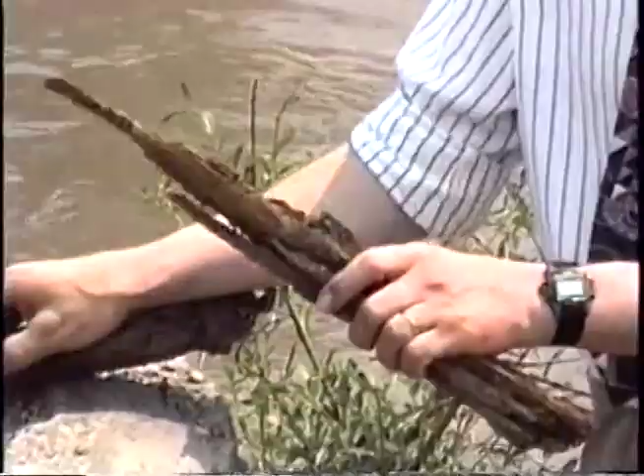A boring was taken down through the center of these columns, and what was found is that these steel-encased concrete columns are founded on wooden piles that were driven down to support the loads of the bridge. We found these old wooden piles that the concrete piers sit on are rotted and degraded from the years. The first several feet were totally missing, so we determined that the existing piers were not suitable for construction of a new bridge.

The study process includes several steps. First, define the purpose and need, or why we're doing the project. Second, define the alternatives considered for the project. Third, assess the impacts of those alternatives. Fourth, prepare an environmental document that meets the requirements of the National Environmental Policy Act, or NEPA. Fifth, obtain agency and public comment. And sixth, select a preferred alternative for implementation.

To accomplish the process, we've devised several ways that the public can get involved and we can obtain their input.

The first is a series of public workshops. We've already held two of those workshops, and there'll be another one here later this summer.

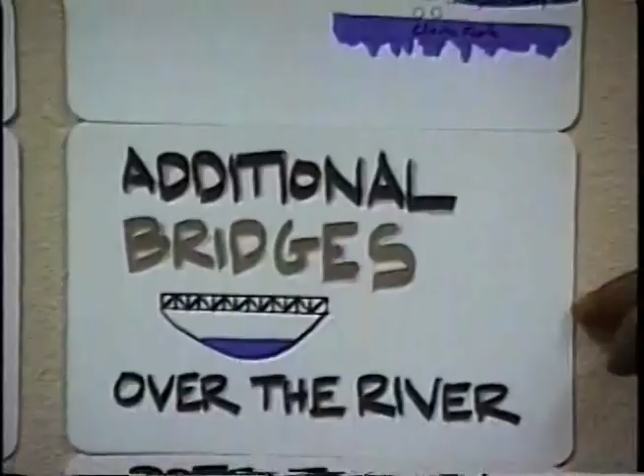There's been concerns voiced along the river corridor about the number of bridges crossing the river, and that people feel like the number of bridges may detract from the visual aspects of the river corridor.

And potential impacts to the island. There's an island located at California Street that will ultimately need construction of a pier, and what are the impacts to the island as a result.

We have a column of others. If you have any other issues that we need to consider—this is just a brief summary—please feel free to contact us.

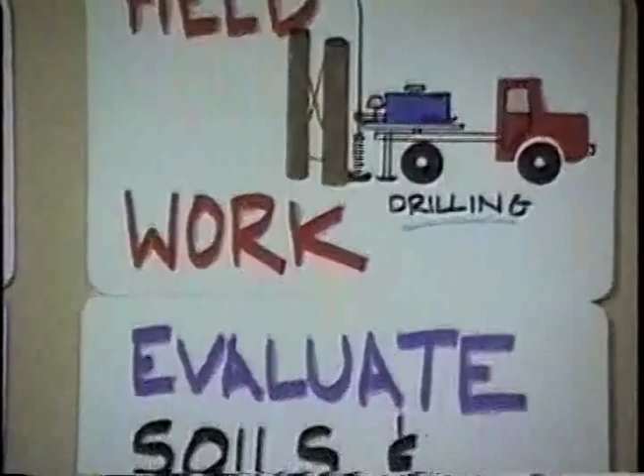Another part of our work was to evaluate the adequacy of the piers from the old bridge that was installed in 1906. As we talked about in the field, we performed drilling of those piers to assess their condition and found they were not suitable for use in a new bridge. Also included was a structural evaluation, a hydraulic analysis, and an analysis of scour to determine how susceptible those existing piers would be to erosion during flood events.

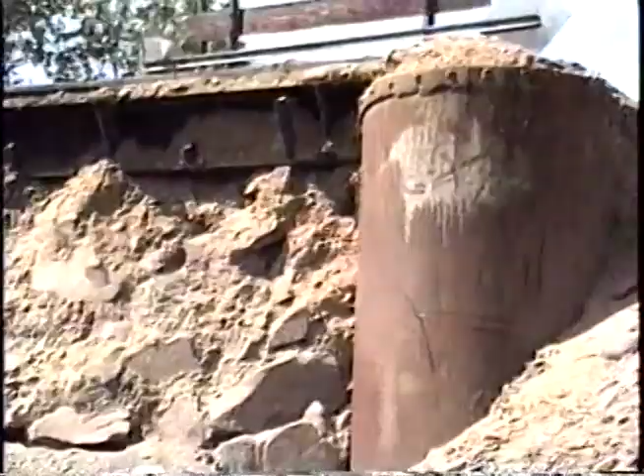Also part of the study is to prepare a NEPA document. As I mentioned before, the NEPA document meets the requirements to qualify for federal funding. Basically, an environmental document has to be completed to assess all of the environmental impacts of a project before it can be eligible for federal funding.

To review that briefly, what's contained in a NEPA document is documentation of the project's purpose and need, a description of the alternatives considered—which will typically always include the no-build and the build alternative—and then an evaluation of different areas of the environment and what the impacts are.

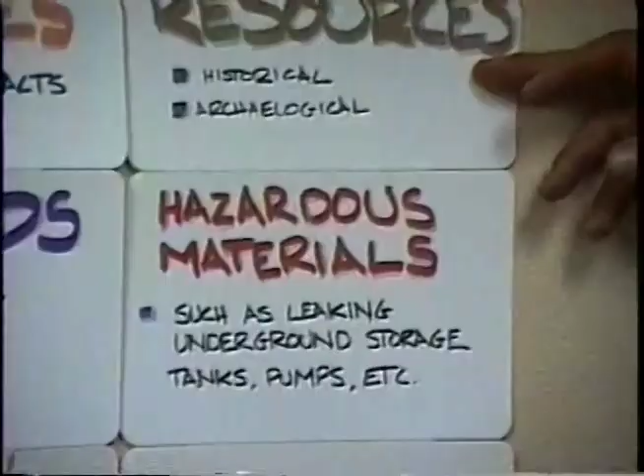Land use impacts, socioeconomic impacts, transportation, right-of-way impacts, farmland impacts, air quality impacts, noise, water resources, wetlands, wildlife, and fisheries, floodplain impacts, impacts to threatened and endangered species, impacts to parks and recreation, cultural resources including both historical and archaeological resources, impacts to hazardous materials that may be present in the project area, visual impacts, and impacts of construction such as noise, traffic delays, access, and so on.

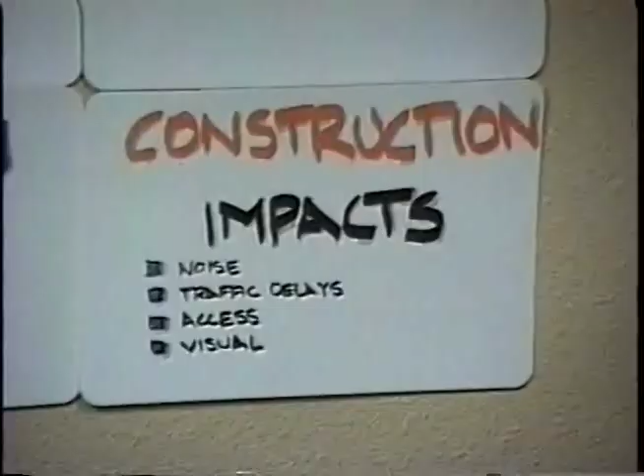So that summarizes all of the areas of the environment that are evaluated in an environmental document.

The California Street Bridge was identified in the non-motorized transportation plan that Missoula developed a couple years ago. The transportation plan identified a system of both trails, or off-street facilities, and on-street facilities to integrate non-motorized transportation such as pedestrians and bicyclists into the transportation network.

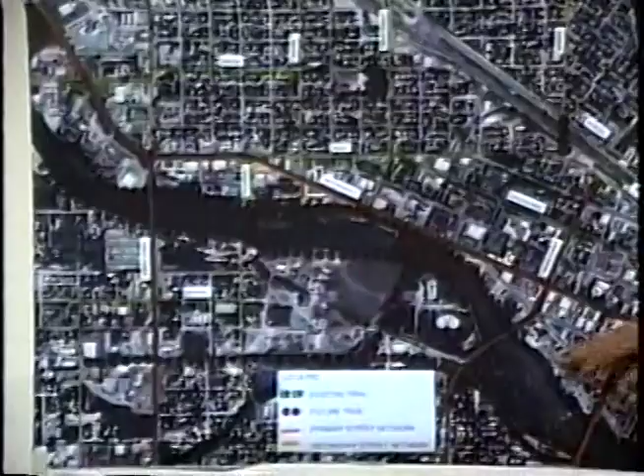The existing trails are shown in green squares, and it may be a little hard to read, but it involves the trail system that is the riverfront trail system in the McCormick and Caras Parks and South Shore Park areas. Proposed is an extension of those river trails along both sides, shown in red. The California Street connection is shown here.

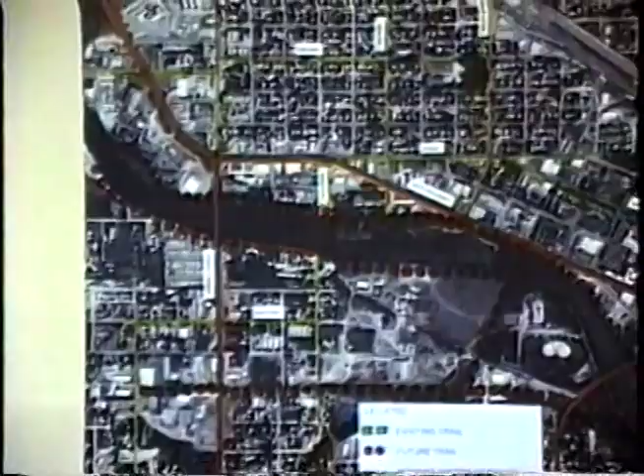Also included in the plan was a system of on-street facilities on both the primary streets, shown in orange, and the secondary streets, shown in yellow.

Once it was determined that we couldn't use the piers, then we took a step back to really evaluate whether California Street was the ideal location for integrating into the non-motorized transportation system.

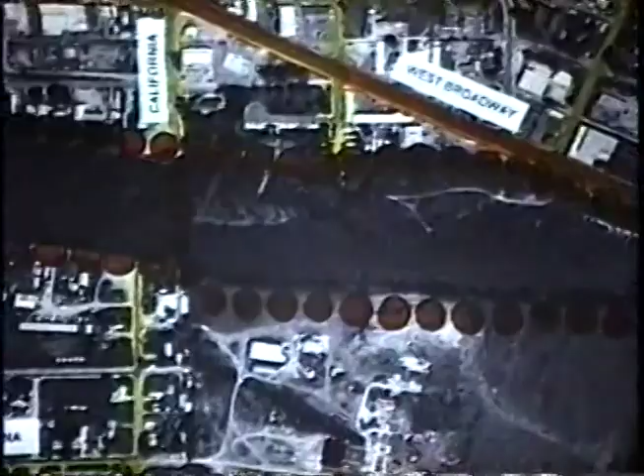We considered four different sites: one, a pedestrian bridge adjacent to the bridge at Russell Street; a bridge at California Street; a bridge at the end of Burton Street that would align opposite the old Champion Mill site; and another one at the end of Scott Street, also tying into the area on the south side, on the Champion Mill site on the south side of the river.

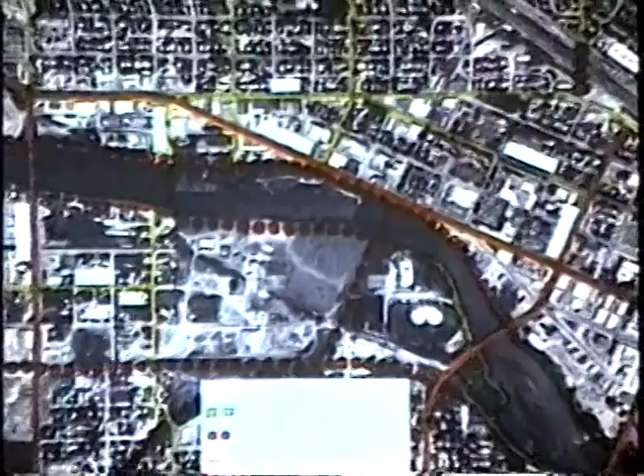In considering all of those alternatives, we developed a set of evaluation criteria to evaluate each one of these alternatives with regards to one another.

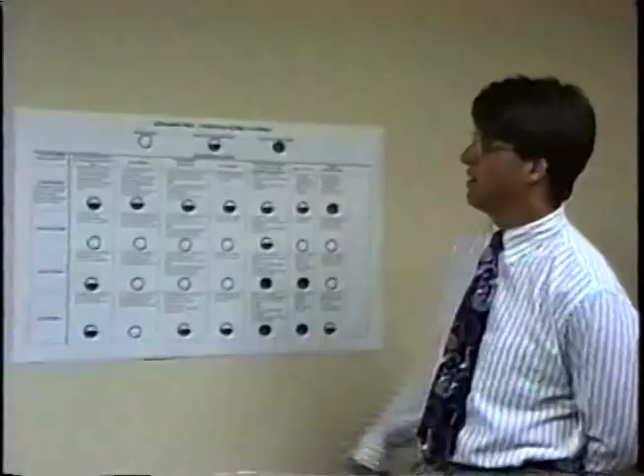I'm going to describe this briefly; I'm not going to be able to describe the entire evaluation. A copy of this was contained in the second newsletter that was distributed. If you'd like a copy of this evaluation matrix, please contact us and we'll send you a copy of that newsletter. But the criteria evaluated included conformity with the non-motorized travel network plan, as I described.

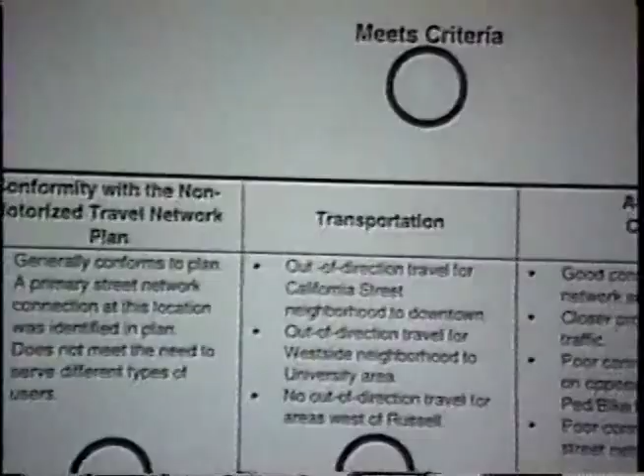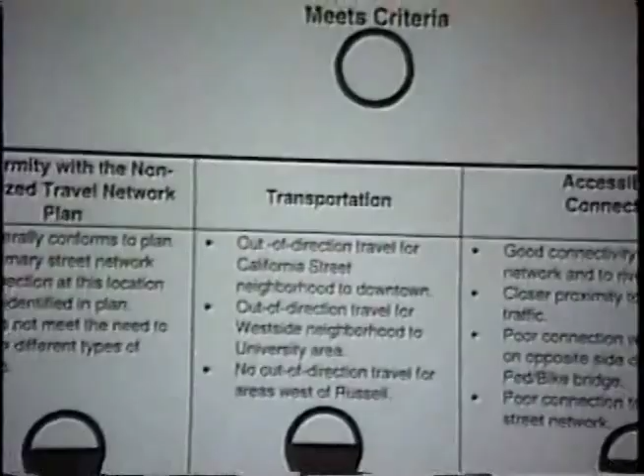It included transportation, which involved how well the bridge location served different neighborhoods for people trying to achieve major destinations such as downtown or the university, and whether it was a direct route for the people living in those neighborhoods to reach those major destinations.

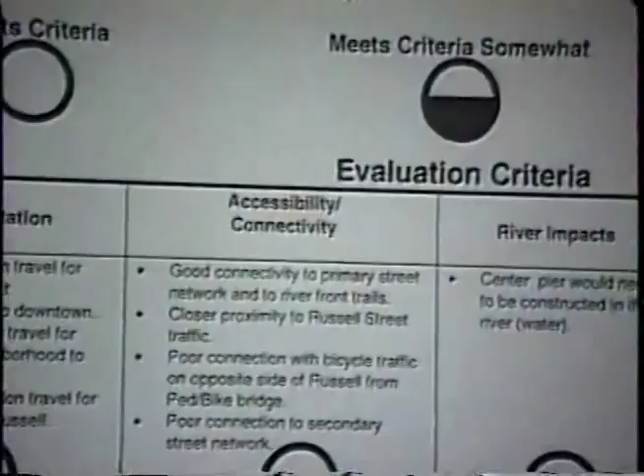We considered the accessibility and connectivity to the rest of the non-motorized travel network, and how well it connects both to the trail network and the secondary and primary street networks.

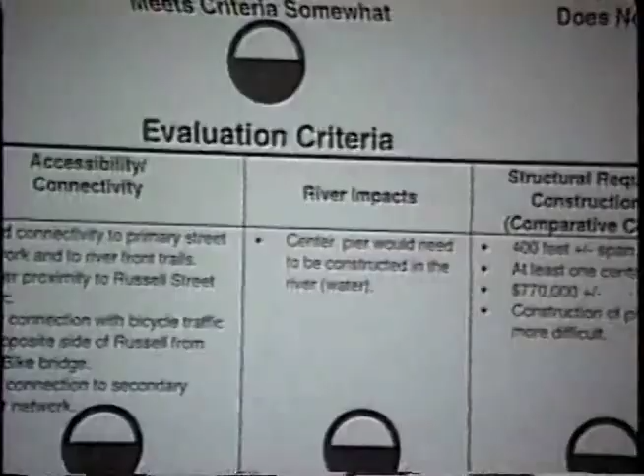Also, we considered the impacts on the river, since the different locations would involve different types of pier construction, either on islands or in the river.

We looked at what was involved for structural requirements, how long the bridge would have to be, and what the construction cost of each alternative would be.

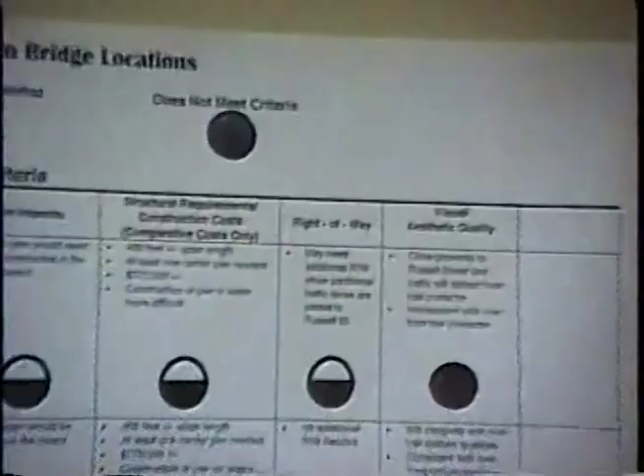We considered how much right-of-way would need to be acquired for each of the alternatives, and we also considered the visual and aesthetic quality of each of the locations.

As a result of that evaluation, the project team, in considering the public involvement gathered from the second newsletter and the second public workshop, determined that California Street does fit the best.

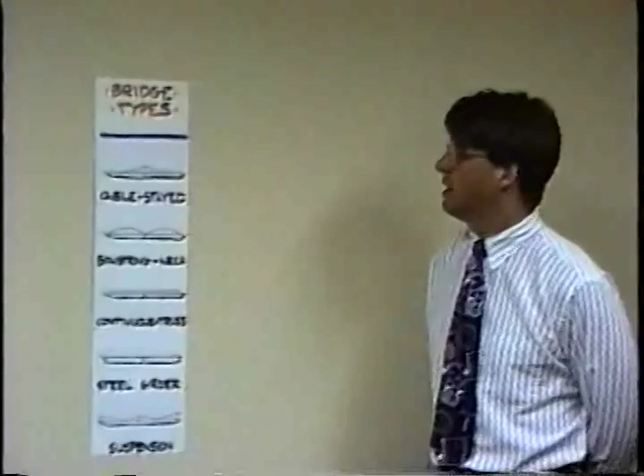We're also considering different types of bridges. We'd like to hear your input as to the type of bridge you'd like to see. There are several types we've identified here that we can consider, starting with a cable-stayed bridge.

Basically, a center tower would be constructed whereby the bridge would be suspended from cables strung to that center tower.

Another option to consider is the bowstring arch, whereby steel arches would be constructed, and then the bridge deck surface hung from those steel arches above the bridge deck.

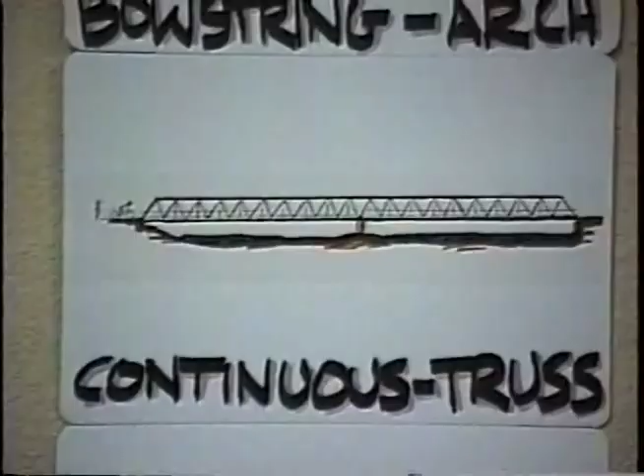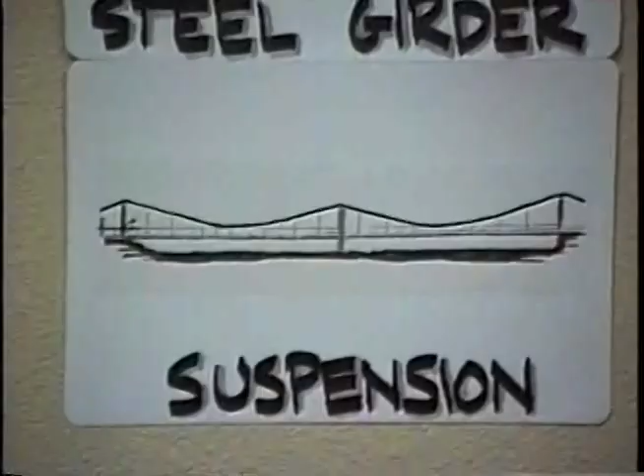We can consider the use of a more conventional continuous truss constructed of steel. Also, another more conventional simple bridge would be a steel girder bridge, and then another would be a suspension bridge, whereby towers would be constructed above the level of the bridge and a cable suspended from which the bridge deck itself would be hung.

And again, we'd like to hear your input on it, both on the bridge type and also on the bridge materials. We have the opportunity of constructing a surface or bridge deck out of different types of materials, such as wood or concrete or other materials, and we'd like to hear your input on those different types of construction as well.